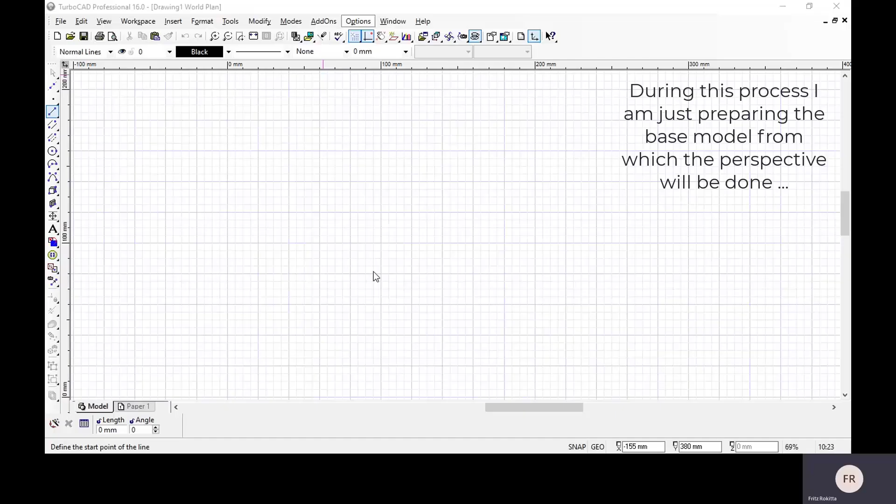Okay, grade 12s, let's go. I'm going to try and measure things as I go along. 20 for the top is thickness, 70 length, and then it's a 30-60 degree angle, 20 thickness.

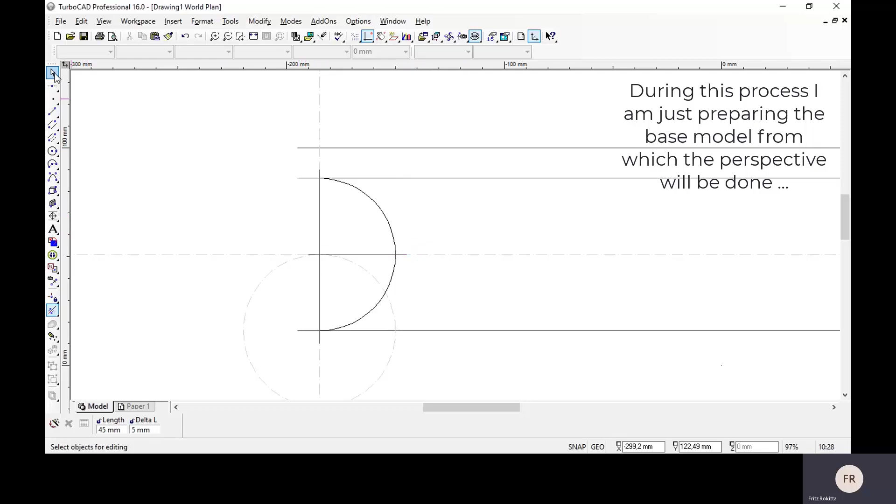The idea here is just to get the reference points on the curve. Chances are you will never get a full circle in an exam to do, only an arc, half a circle. Where I want to start off is with the top view. Go to your top view, get the middle of that slant, draw the center line on there.

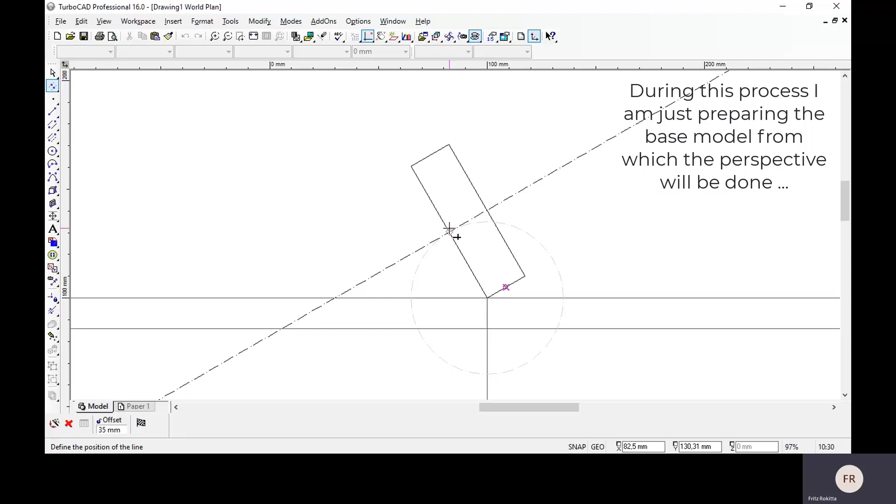I'm going to place my compass on the outer edge of that arched area. Did you notice I now extended the center line so that it cuts through the edge of that arc? I need that, so without that, I also can't do the full construction.

Well done, you listened. You split your circle into 12 segments. But do you need to have all 12 segments? No, 6 segments is enough because it's a symmetrical shape. So what's on the one half will be duplicated on the other.

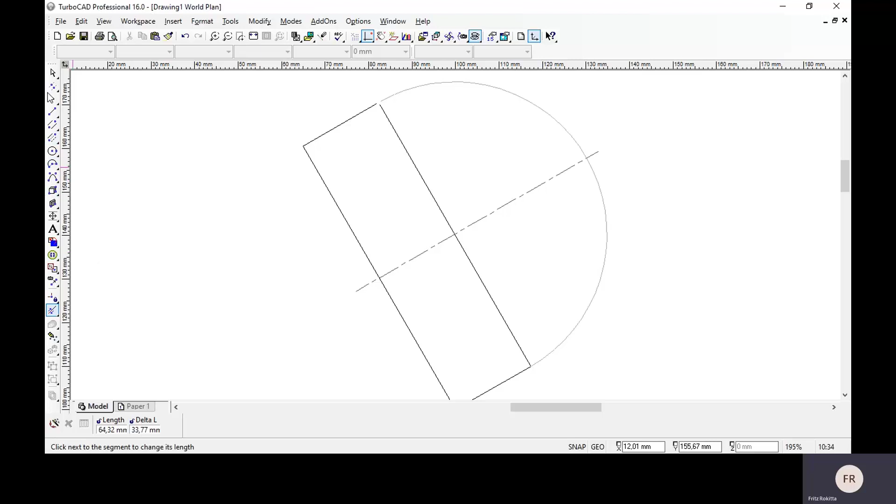You take your compass with that very same radius that you use, which is the construction of a hexagon. Do you remember? So I take my compass with the exact same radius as I'm going to start here, and I'm going to go and use the same radius and mark off there.

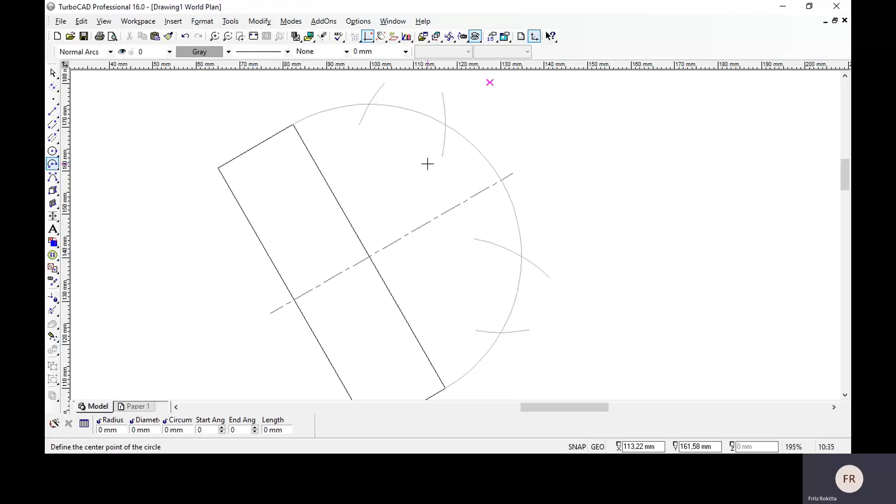And there you go. It gave me the 6 intervals or reference points for dividing the arc into 6 segments. From the center point over there on that outside edge to that intersection, from there to there, 6 equal segments. Now that I have those, what's it?

1, 2, that one I already have, 3, 4. Those 4 points that aren't either on a corner or in the middle, but off center, that point there of my arc is already projected 90 degrees to the surface. That's the key that you are looking for.

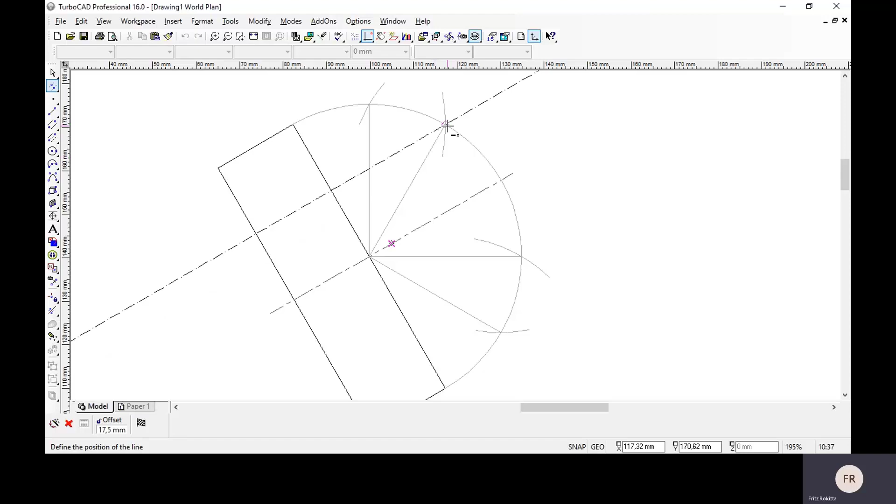You just now want to go and draw 90 degrees from those segments that you've created towards the edge of your top view. You can use your set square for this. From here, 90 degrees onto that surface.

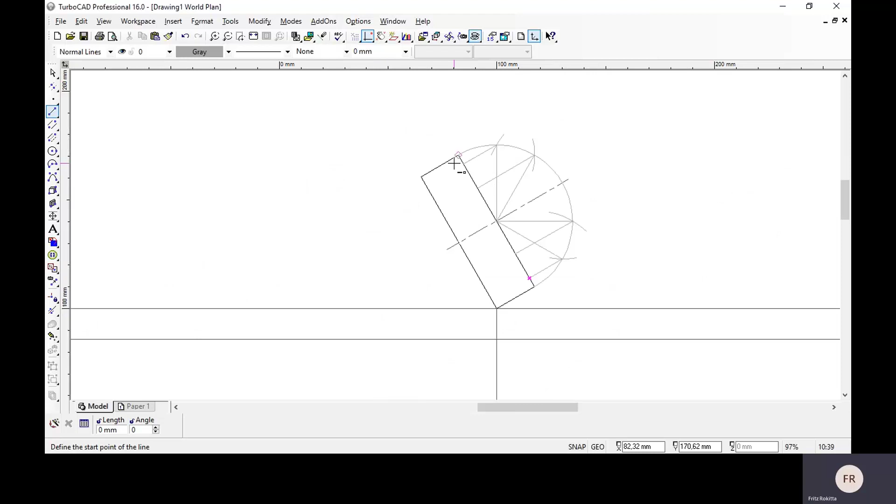So those that you project from the reference point to the surface area must be projected. I like to take those projections to the front. Bring it that way. The rest of my drawing, I must work with my front view.

You all know by now that in TurboCAD, if you right click on these icons on the left, you can change the properties to default, whatever you wanted.

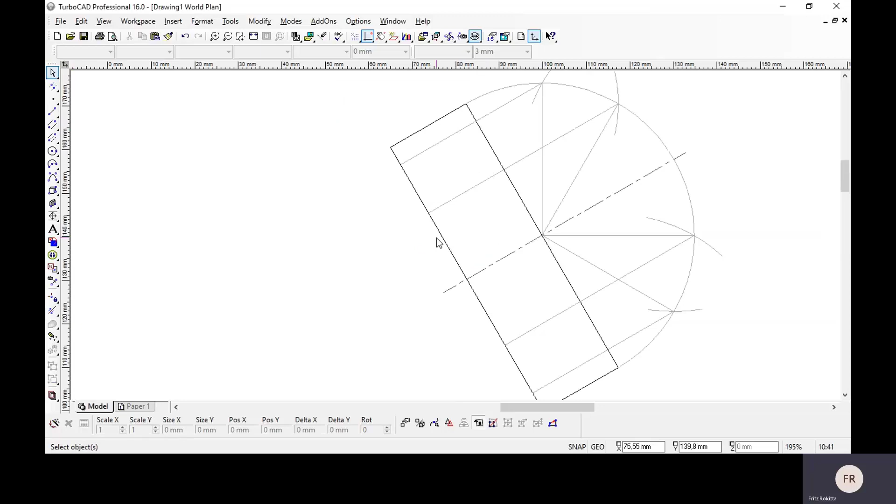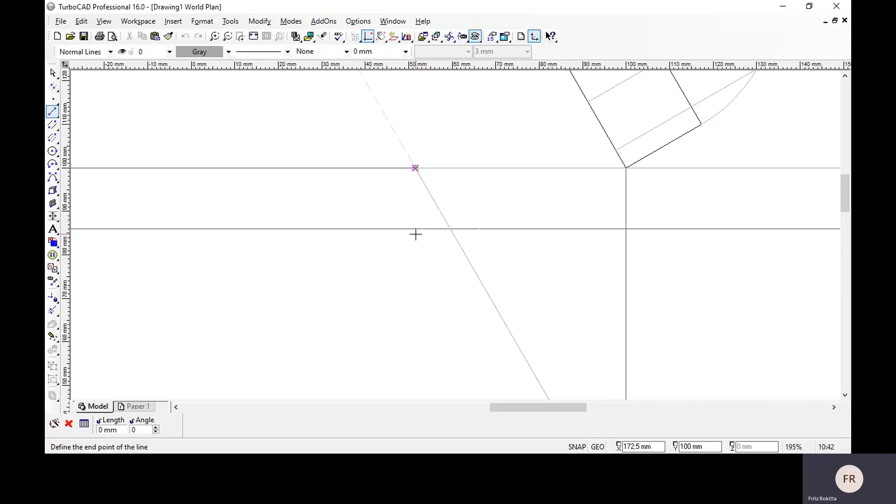Parallel to the edge of this side and to the edge of this side, you're going to project your vanishing points. So from the SP to the left, and then to that one side to the right from the SP. And then from the picture plane, you take it 90 degrees down. So I'm going to call that LVP, left vanishing point.

At the moment, we only have 3 heights, which is the bottom, the middle, and the top. We now also have to divide this half circle into 6 segments. So we go through the process once again.

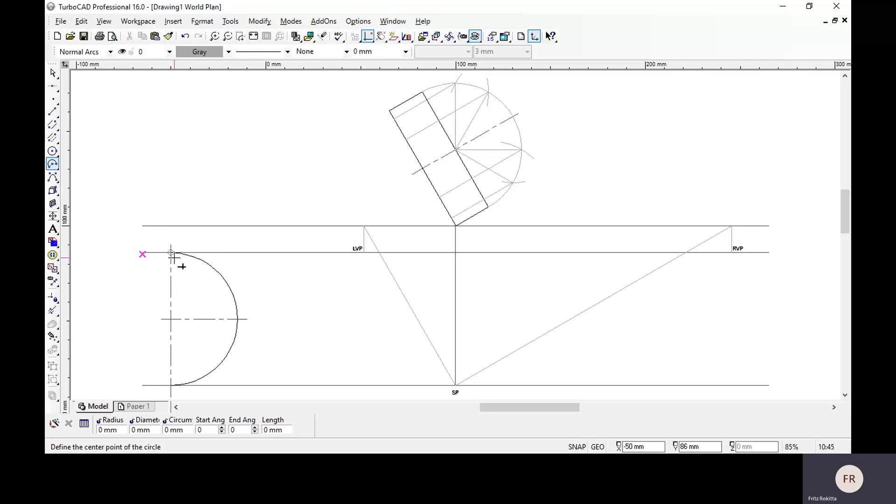Take our compass, use the radius, which in my case is 35. I just want those 4 increments or intervals. Now I've got 1, 2, 3, 4, 5, 6, 7 heights.

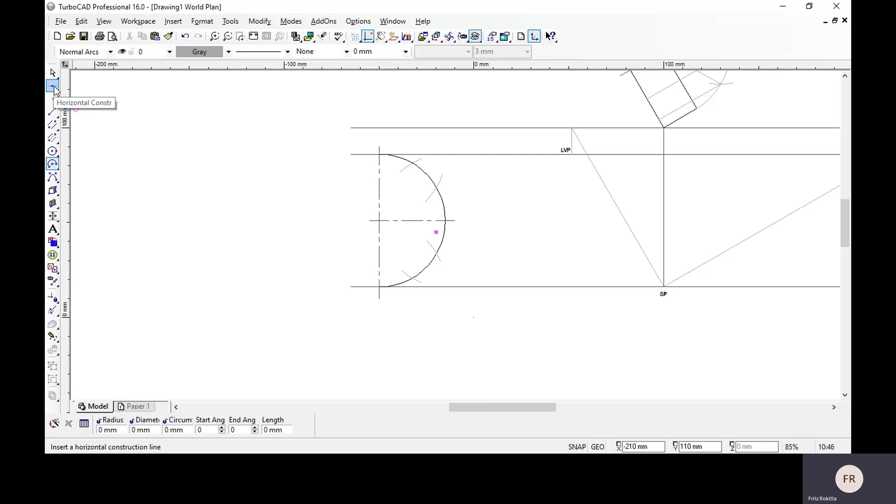But the baseline doesn't count because obviously it is at the base, and the top doesn't count because it's already at the top. Heights must be projected to the anchor line. Therefore, I'm going to take my ruler or board ruler, and from those heights, I project them to the main anchor line.

We're going to take them now to the vanishing points, also take from the top view down to the SP so that we get the intersection. Every reference point needs to do two things. It needs to go to the vanishing points, but it must also be projected from the top view. And where they intersect, that's your reference point.

Here, I want to caution you, do not do all of them at once. Take them one by one. Let's start from the bottom, work our way up. The first one is easy, it's already there. There's the first one that's provided to you.

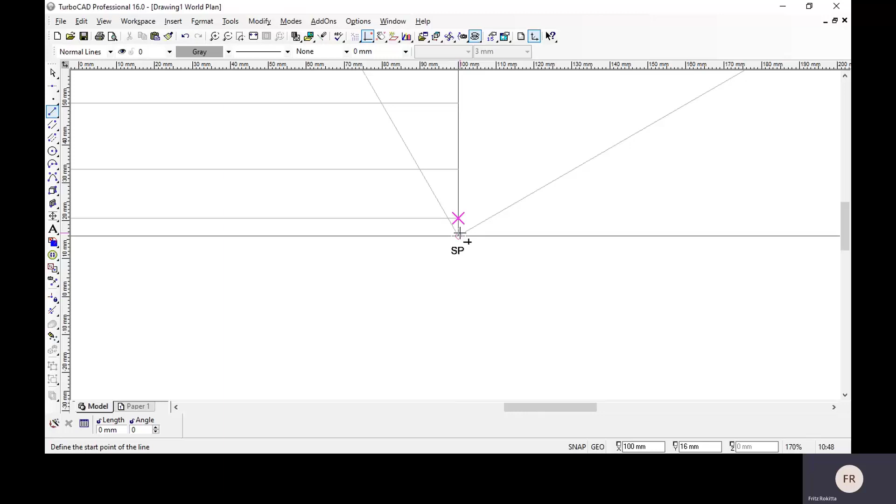We also need to understand now, firstly, if I were to draw a light construction line straight down, that point where my mouse is now would have been that point on the SP. Do you agree? This is a disc cut out of a square. Do you agree? So if this was a square from there to there, a line, then that point where my mouse is would have been the SP.

That point, the SP, is not this bottom of the circle. Do you agree? We still need to now work towards the center. I want to get the highest and the lowest points, and then after that, the point that's furthest to the right and the one that's furthest to the left.

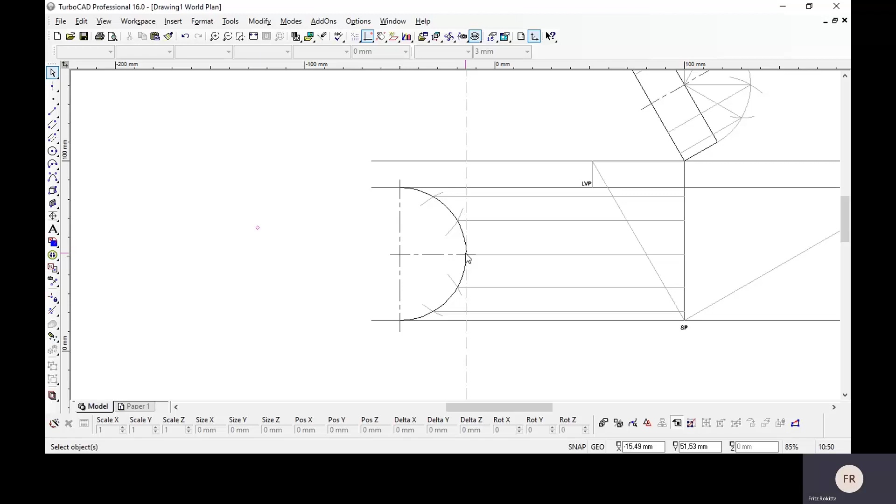Many people, they say, let's get that point because that's the easiest one of the whole drawing to get. Why? Because if it was a square that you just had to draw instead of a circle, this corner there, that point, would have been right there. So you can do that if you want to.

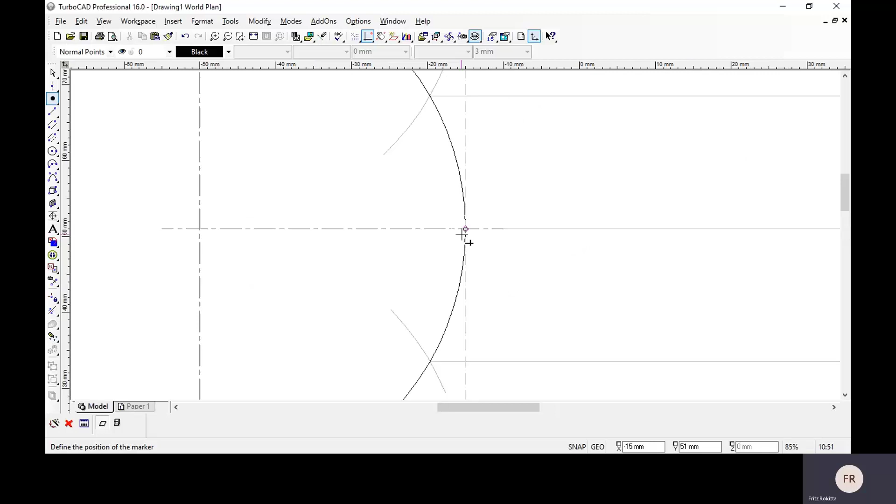So I'm going to use my point tool. I'm going to right click here on that to just change the properties. Point, make it a circle, make it now 0.5. And I'm going to place that point right there, which is the center, that one there on the edge. We just project now from that middle point to the left vanishing point.

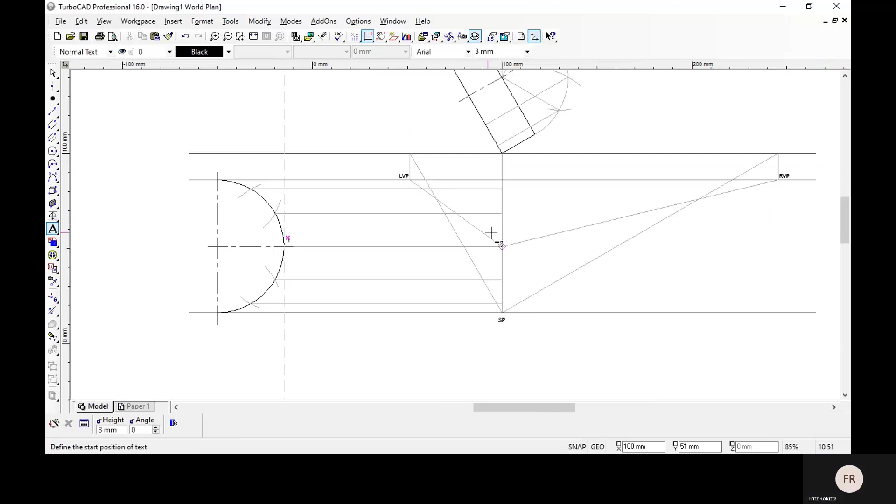And I can also do it to the right vanishing point, which I'll only use much later, but I'm going to do it in the meantime. I'm going to call that number 1. Okay, that's number 1, going to both vanishing points. So I have the horizontal middle.

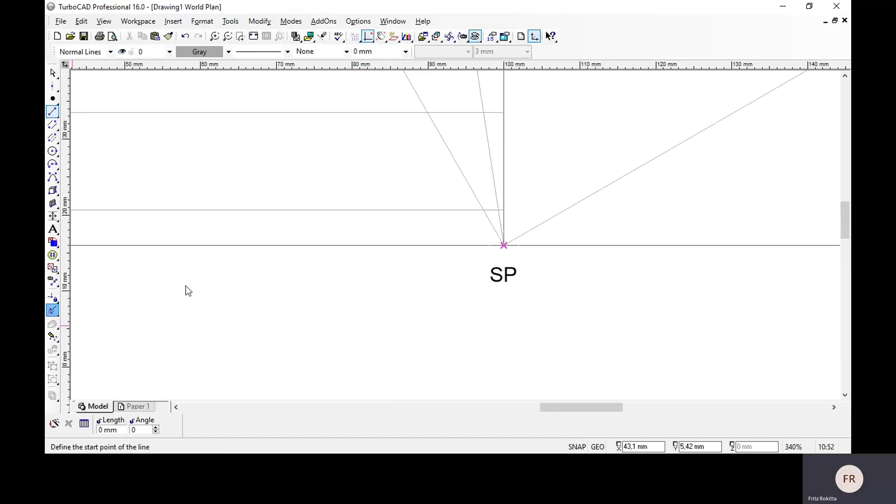Now I want to get the vertical middle. This is the horizontal middle that I just projected. Now I want to get this one, which will show me the vertical middle. From this front middle, I'm going to go to the SP. Remember, you don't have to draw it all the way to the SP, just make sure that if you were to project it, it would go to the SP. Then take it down 90 degrees from the picture plane, straight down. I'm going to leave it extended for the time being.

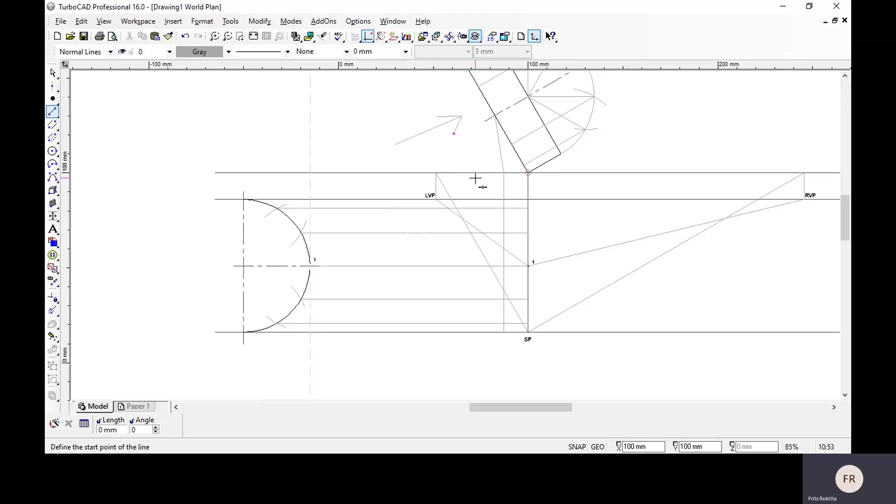That will give me the exact middle. I'm going to look at it from there. Now that I have the middle, it's easy to get the far left edge. I have the far right edge, I've got the middle, now I just get the far left edge. So what I do is I go to that far left edge, go to the SP, and go through the whole process once more.

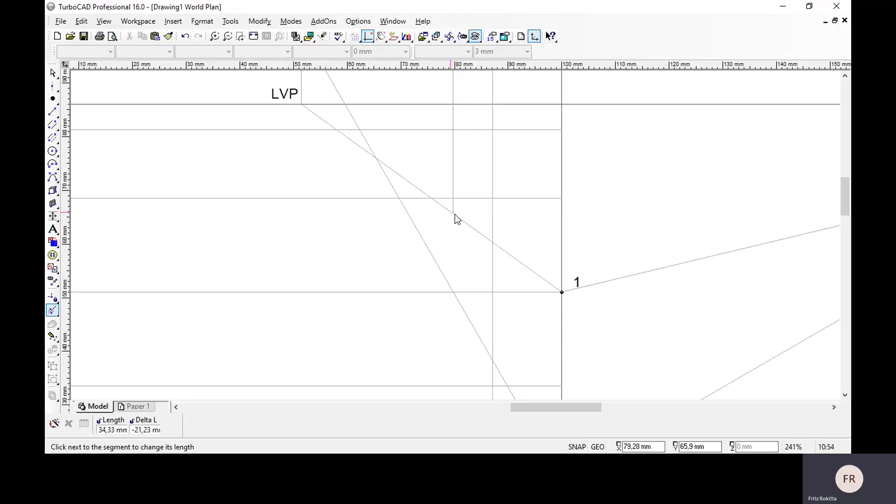And bring it down. This time I know that it actually will stop at that height. So I know the far left edge will stop there on this middle, because this number 1 is the center line, the middle horizontal center line.

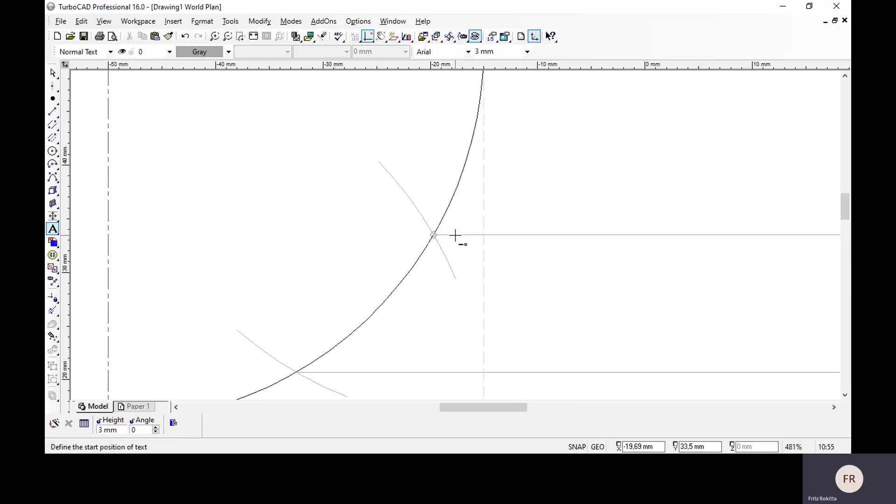The next one that I want to determine is the top and the bottom. I'm going to start with the bottom. To get the bottom of my vertical center line, which means this point here. If that's 1, this is going to be 2.

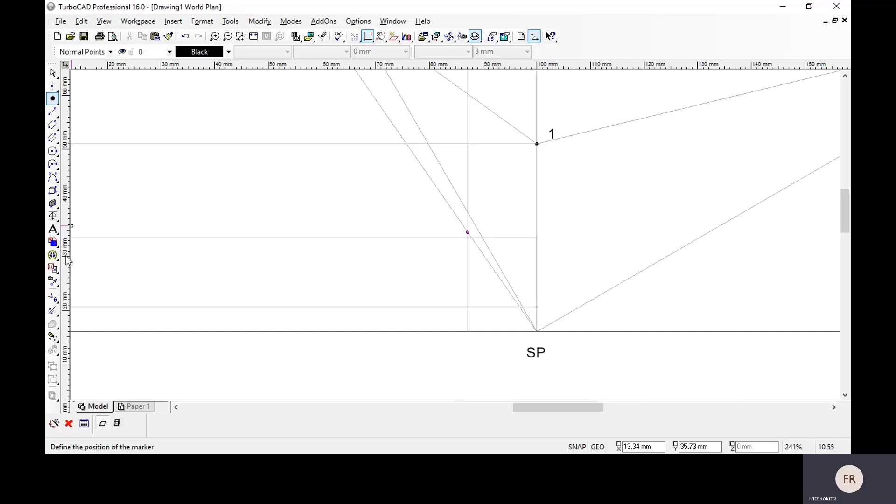That's what I want to get. Draw from the SP, the baseline, to the left vanishing point. Now I know how low on this middle line. Do you agree? This is the middle center line going down to that point there. That's where number 4 is going to be. So I can actually erase the X's and just stop that line there. There we go, so number 4 is there.

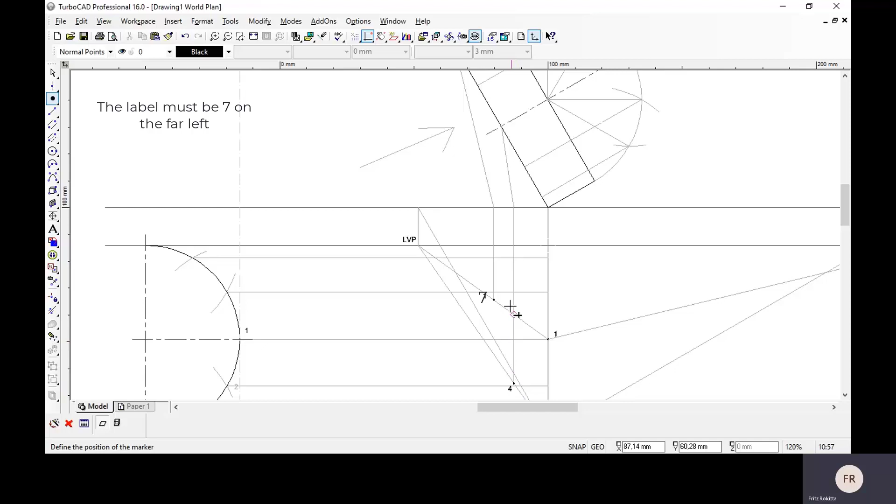So how do I get the top? I need to go now all the way to there and project it to the left vanishing point, but it will stay on my horizontal line. To get that top point, that's in the middle, you need to go and take that one and just plot it where it is on the horizontal line. The key is it must be straight above 4. So if you worked correctly, it will be there. The top one is 7.

So now I have the extents of my circle, don't you agree? That's what you always do first with any arch, the ways they've asked it in the past. They've asked it with the arch of a window at the top. They've asked it with a door's arch at the top, instead of making it a straight door, they just change it to an arch. They've used it as a garage door that is arched at the top. They've used the braai area that is arched at the top. They've used the swimming pool that lies flat on the ground and then make one of the sides of the swimming pool arch. I have asked a roof section that was slanted into a big archway.

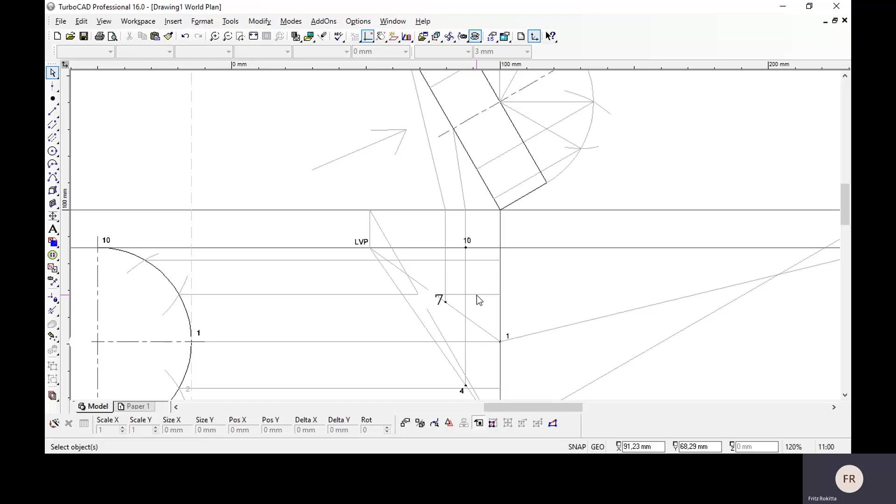Okay people, so yesterday I showed you that we want to get the first 4 corners or edges of your circle always. That's the first step to get, because then you just have to get the increments at 30 and 60 degrees. So let's just do one of them because it's the same for all of them.

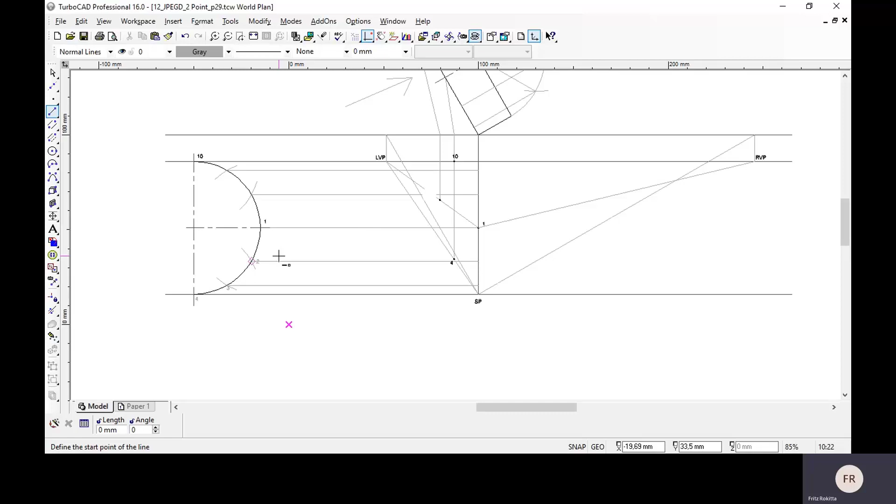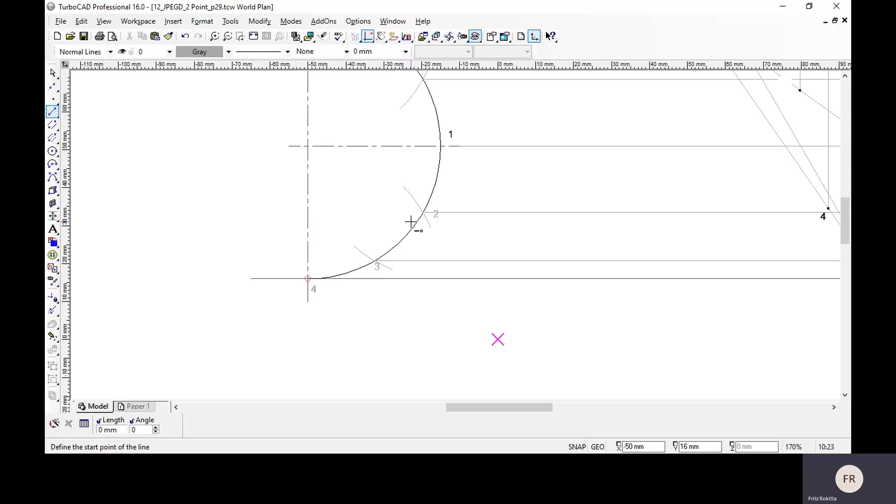So if I'm going to do these 2 at the bottom, then you just apply the same steps to the top. First thing is that we obviously need to work with these segments that you projected here to the top view, the front edge of the top view. And we're going to work with these 2 that we have projected across to the main anchor line. These 2 give us the height, and these 2 give us the depth. Projection from the top view gives me depth. All the projections from the side or front view gives me height.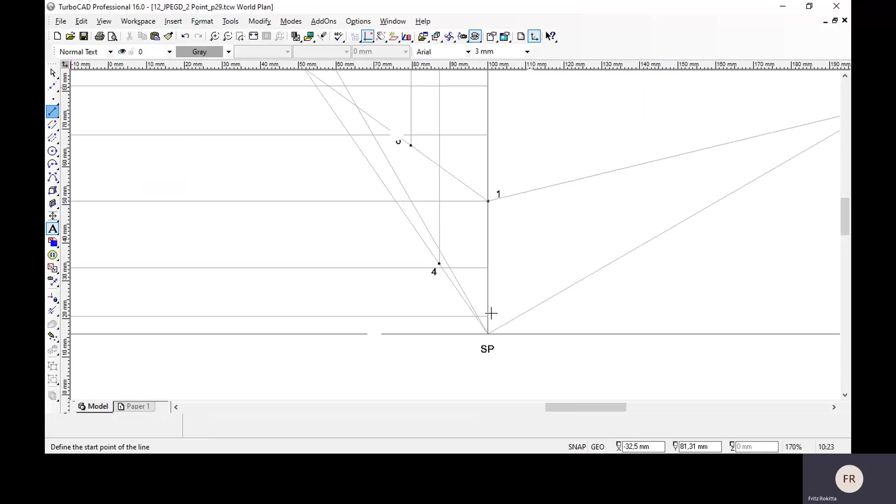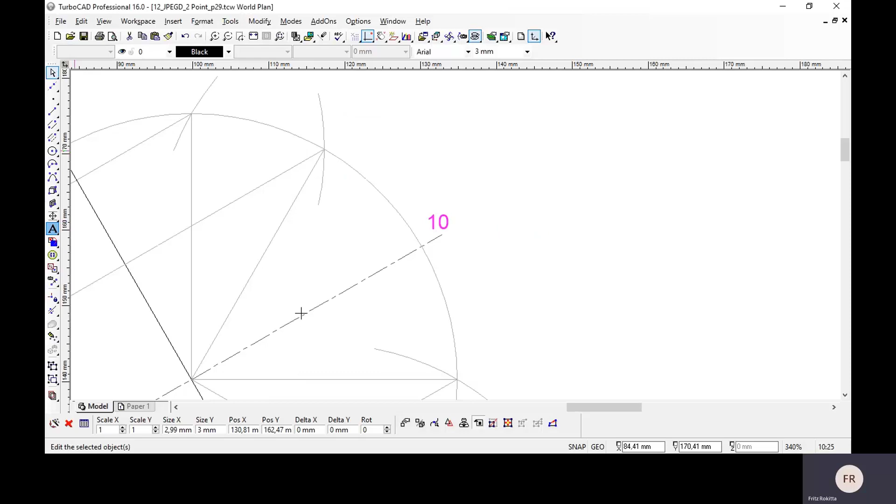Follow number 3 all the way to the main anchor line. From the main anchor line, obviously we're going to go to the left vanishing point. Good, so now all I need to do is make sure that I take number 3's line that shows me the depth. Labeling it on the inside to show that it's at the bottom.

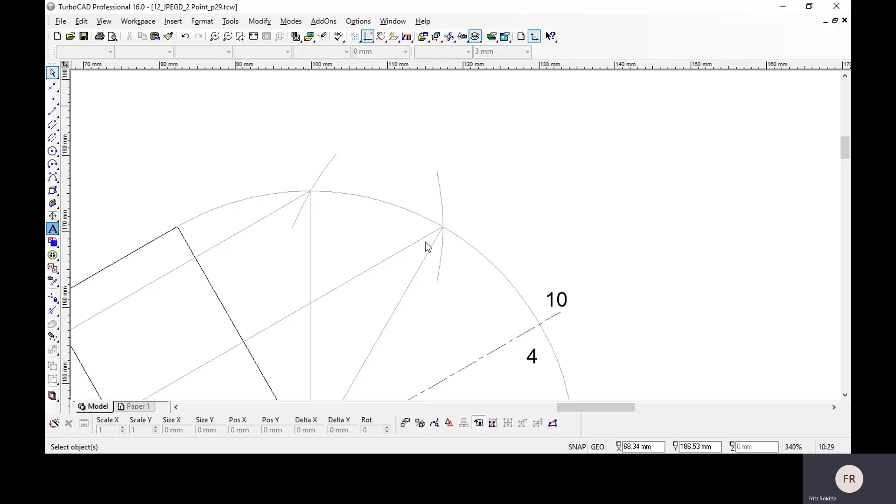Number 1 is the furthest point, so that must be number 1 over here. Does that make sense? Number 10 is in the middle at the top. Number 4 is at the middle at the bottom.

The whole process to get that was just to make sure that when we do our projection now from number 3 here at the bottom, to get that height, we took it to the main anchor line and then to the vanishing point. We have its height position.

Now we need the depth position. We just go now and say to ourselves, number 3 is the one that we want to work with. So it's this one. This must go now to the standpoint to show its depth. And then at the picture plane, we are just going to take it down 90 degrees.

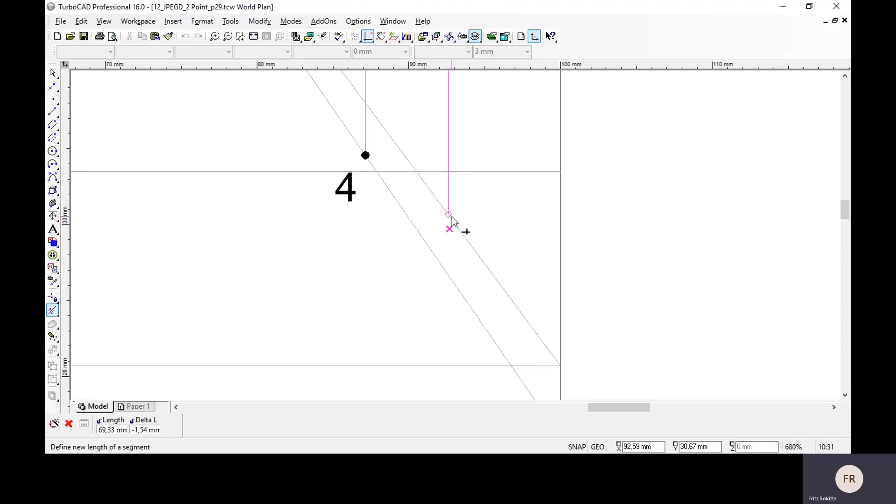Okay, so there's my number 3, a little bit inwards from number 2 because 2 is moving outward and then number 1 is the furthest point on the outside. From number 2, from the main anchor line to the left vanishing point, same steps, just repeated.

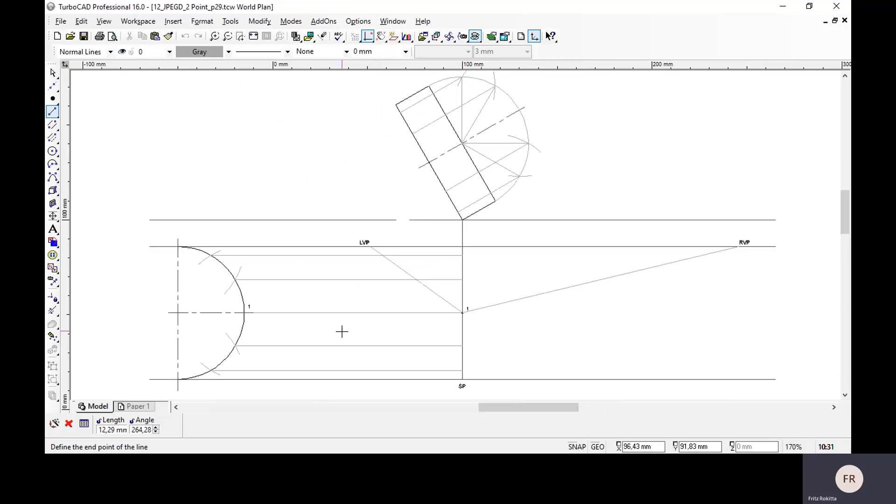And then from the top view, number 2 goes to the standpoint. And from the picture plane, we're going to project it now to the height of number 2. So this is going to be a very sharp corner. So we're going to get our profile there using our French curve.

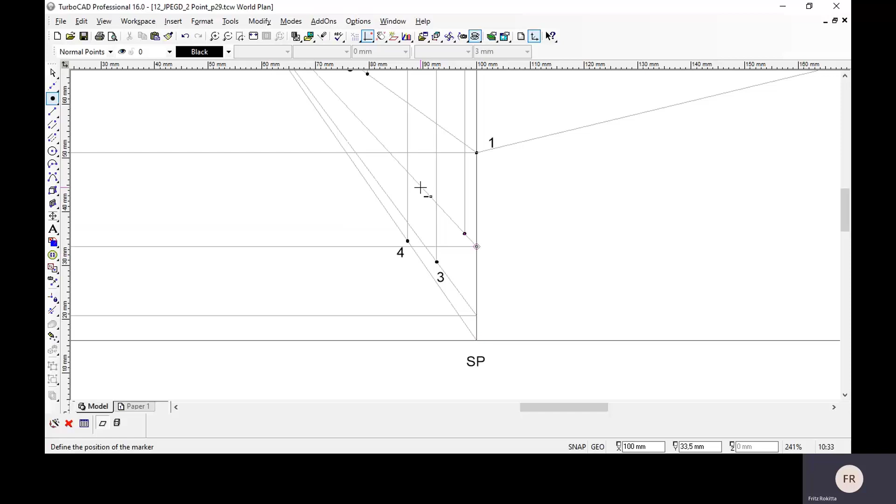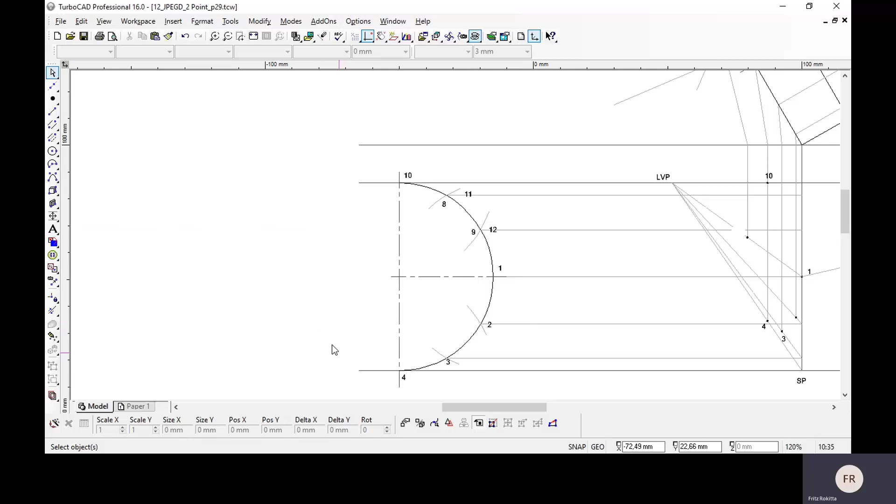But because they're the same there, I don't have to do the projection again. I just now need to get number 5's position in its depth. So therefore, I need to go to my top view, take 5 all the way to the front of my top view, from there to the stand.

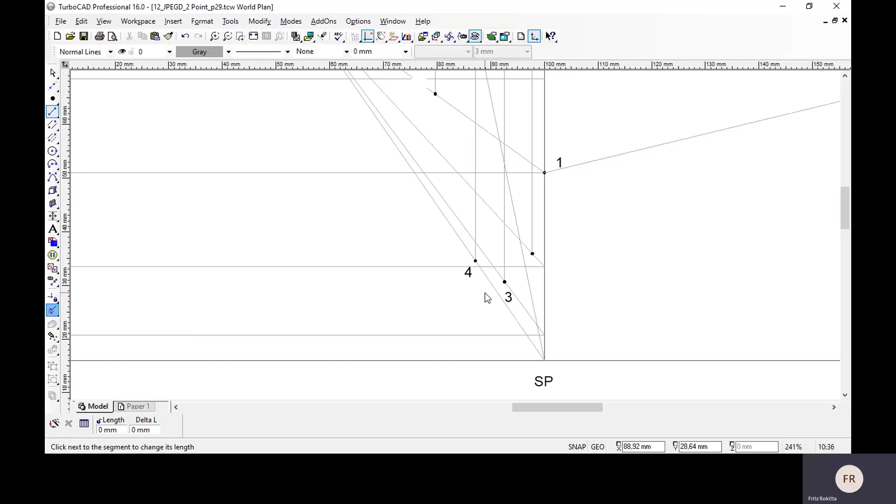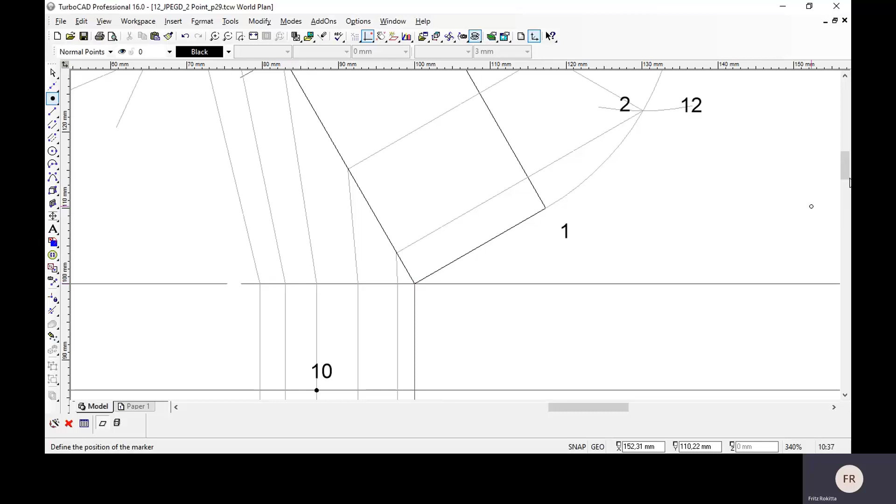And then from there, I'm going to go to line up with 3. So there we go. They've got number 5 on the far end. We took 5's projection, that's there, to the SP, and then at the picture plane, we took that one then straight down to the height of number 3, because 3 and 5's height is equal.

And that will give me number 5. So 3 and 5 on the same height, just different depth. Number 2 over here. Okay, yesterday I placed 6 in the middle.

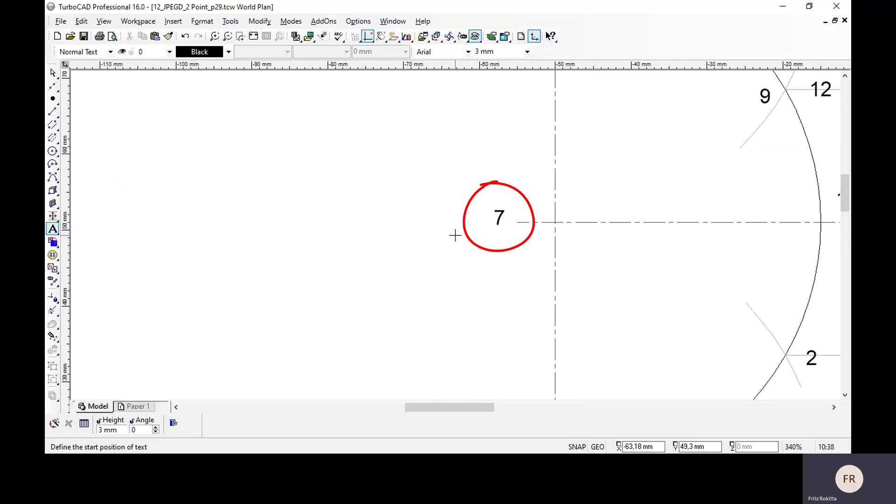It was actually supposed to be 7 because we didn't use a 0. That's where my mistake came in. I should have used a 0 instead of a number 1 at the start. So this 6 here should be also changed to 7.

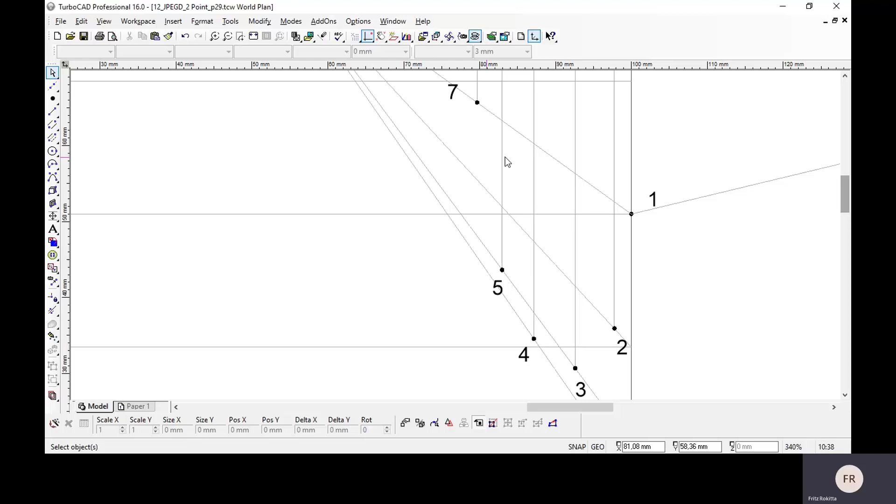Number 2 and number 6 height will be on the same perspective line, meaning the same height, but we need the depth. So for number 6, we're going to go to our top view, and we're going to say to ourselves, there's number 6. From number 6, we take that now to the SP from the front of our top view's disk.

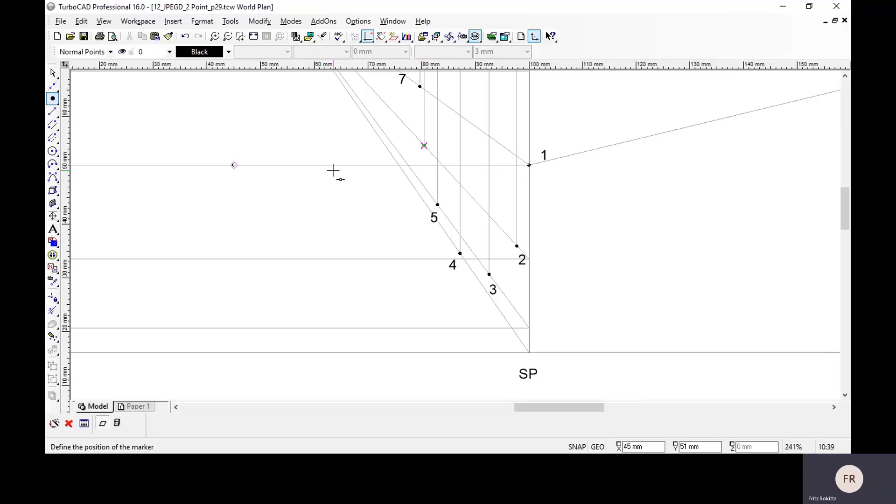So you will do the same at the top. So I've shown you now the whole process, from the front to the back. Now you can just complete doing the top part. I just want to show you how to do the Bezier tool.

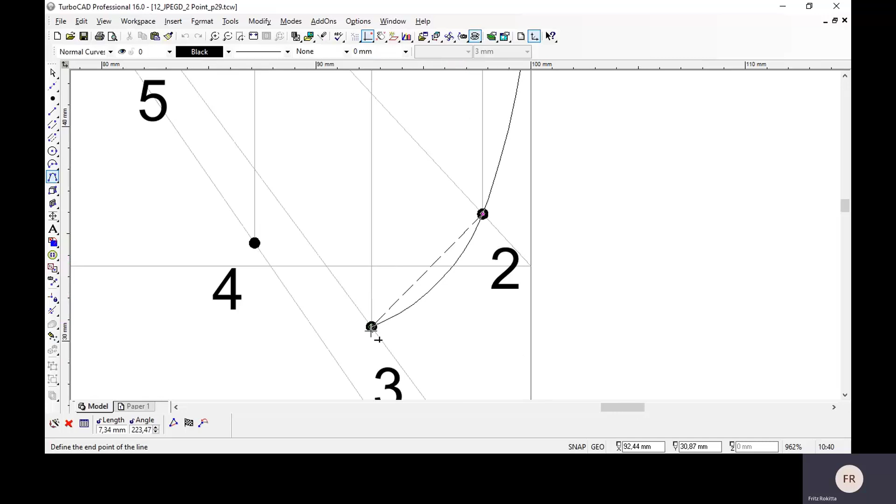Once I've selected that, then I'm going to just click, dot to dot. But look at this, this is where the problem happens now with the Bezier tool. It goes over that line which can't. So you stop there, you right click and you say finish.

Key thing here is to divide your circle into 12 segments on both the top and the side view. And then from the side view get your heights, and on the top you just get your depths. And then you just bring them together. Where they intersect, you are sorted.

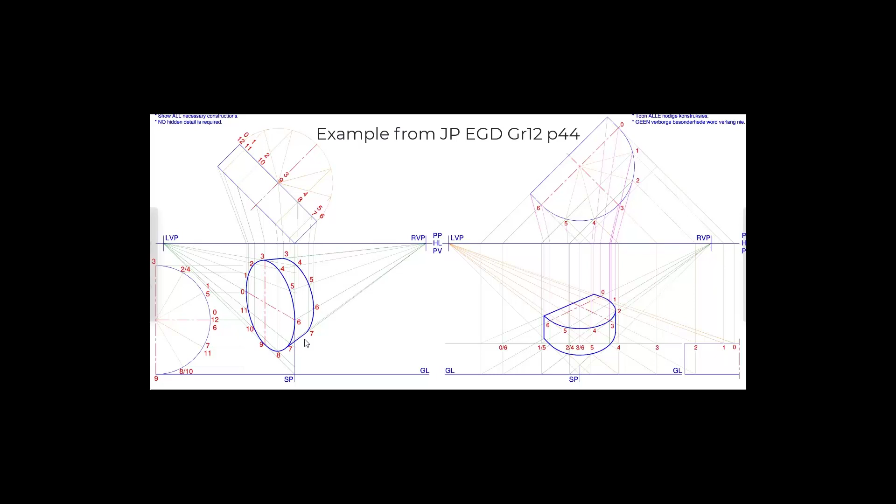To get the back edge, all you do is you take the dots that you just got and you project that now to your right vanishing point. And then on your top view, the back of the disk on the top view, just bring that down to the SP. Please remember, you don't need to take all the dots. Only those facing you will be exposed.

Okay, there's the memo. At the back, do you see here? You just have to take the dots that you've created, in this case number 4, 5, 6 and 7, and you just project those back, and then you take those ones that are exposed here on the right, and you take them to the SP, and where they intersect with those projections you have your dots at the back, and you just draw the curve.

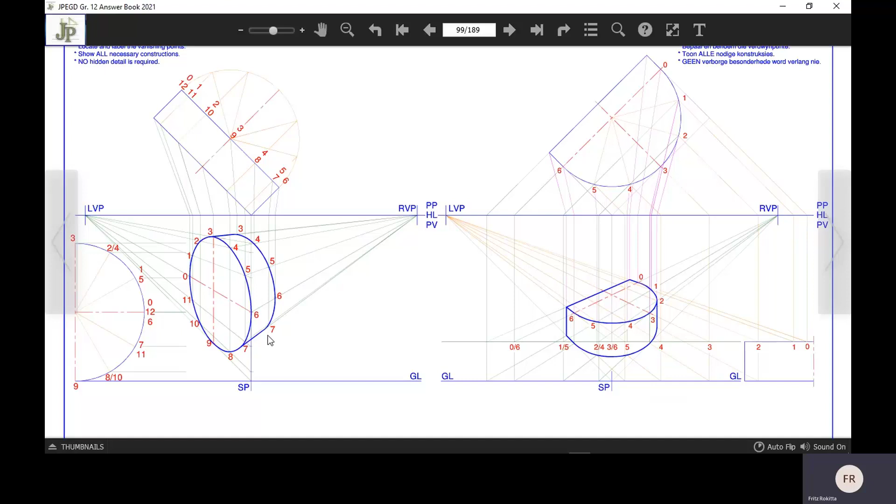The top line and the bottom line will be straight, just to close off the thickness of your disk.